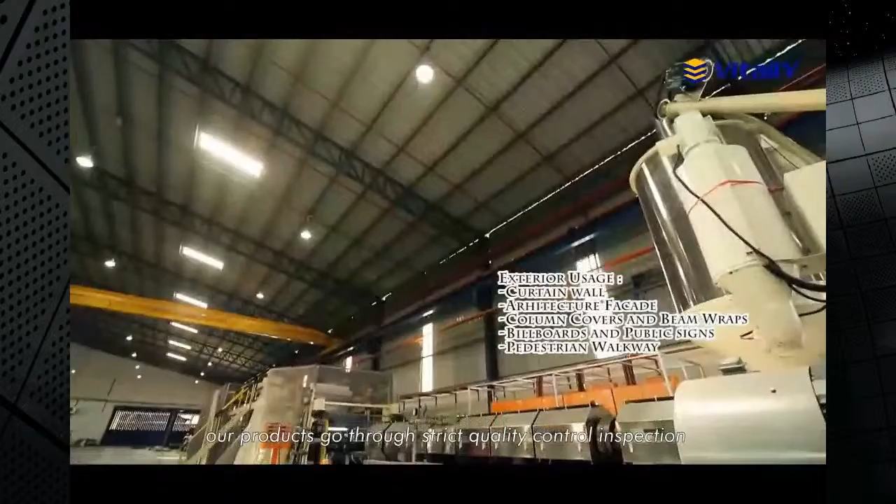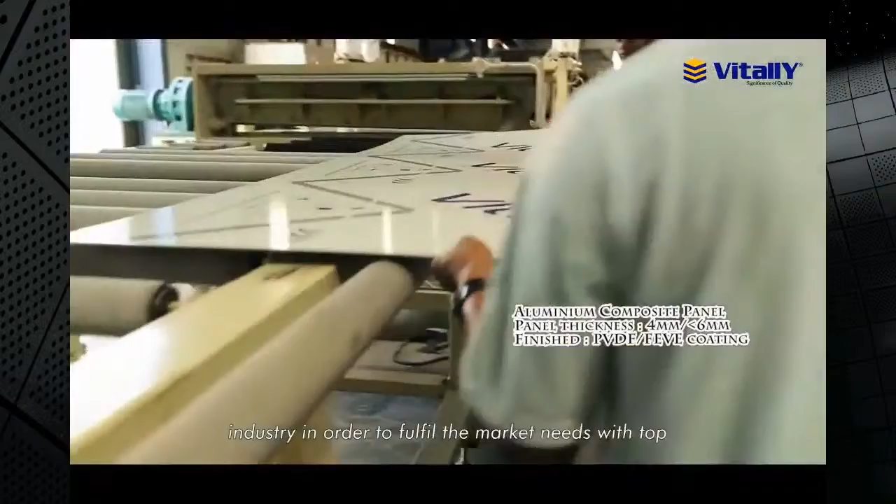Vitally Group is a leading manufacturer and supplier of aluminium home products and aluminium composite panel in Malaysia. We have been awarded Golden Eagle Award and SME 100 Award in 2013 for our outstanding achievement. The origin of Vitally Group started in 1993 when the company's core business was in the trading of construction materials. In 2013, Vitally further integrated into its upstream industry, aluminium composite panel manufacturing. To ensure our products are safe and high quality, our products go through strict quality control inspection. ACP has been widely used for buildings' exterior cladding and interior finishing. Vitally is committed to play an active role in the aluminium composite panel industry in order to fulfill the market needs with top quality products and services.

Our vision is to be the leading aluminium home products manufacturer and supplier in Malaysia, with the Vitally brand strongly present in the international market. Thus, our mission is to continue to expand our business with environmentally friendly aluminium home products, with frequently identifying business opportunities locally and internationally. We have transformed our creative ideas by initiating the Eco Art Panel idea, which is a revolution in the industry. Eco Art Panel is awarded with Green Label by Singapore Environmental Council due to its 0% VOC UV printing. Panel color is guaranteed between 3 to 5 years.

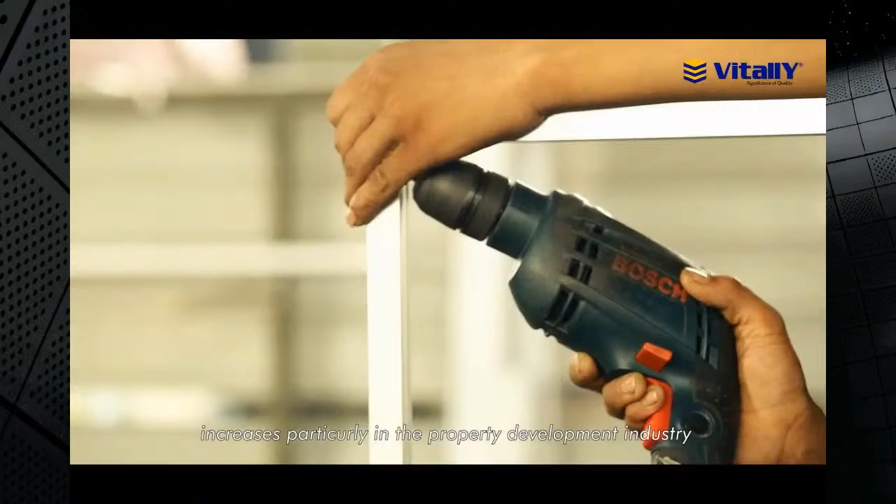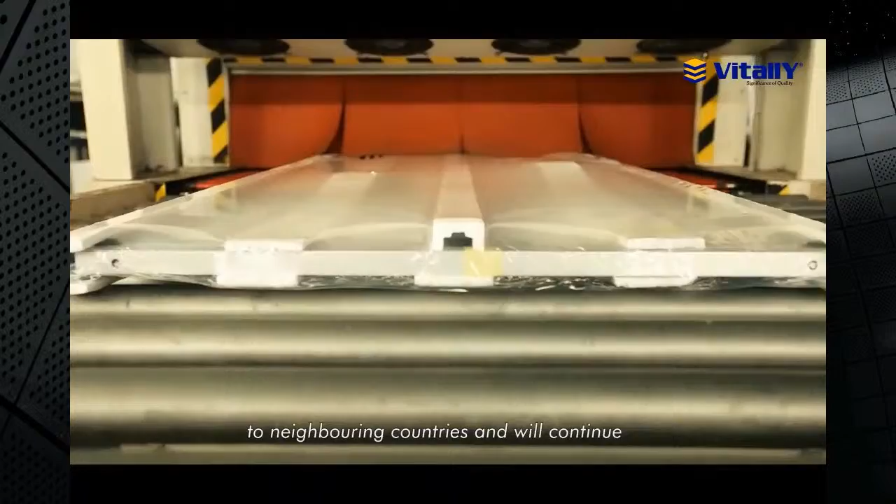As the demand for environmentally friendly aluminium home products increases, particularly in the property development industry, our products can be easily found in numerous high-end commercial and residential properties to international resorts and hotels across the country. Currently, Vitally Group has over 200 employees well spread at our headquarters and manufacturing plant in Muar, Johor, as well as branch offices in Puchong, Selangor, and Bukit Mertajam, Penang. Through our active participation in credible local and international trade exhibitions and fairs, we have recently expanded our export market to neighboring countries and will continue to grow our business locally and internationally.

At Vitally, we believe that a positive and healthy working relationship are the keys to a successful business.

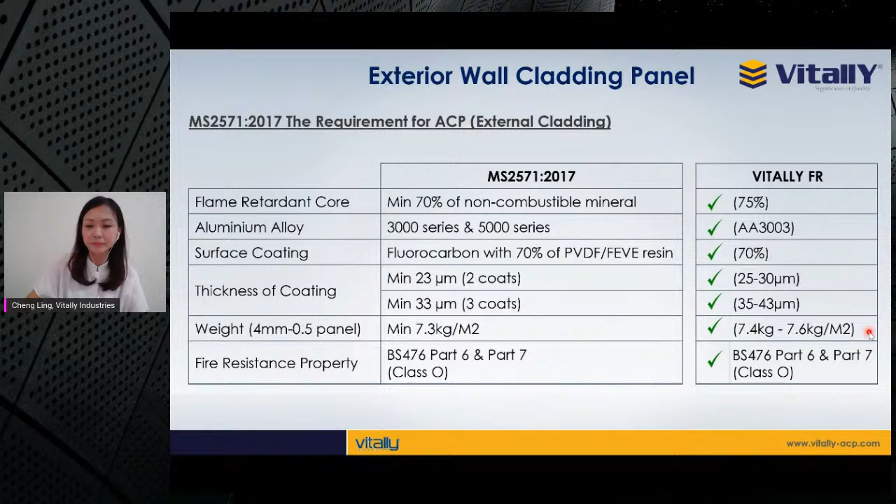This is the standard spec that we have for our FR panel. The total thickness of the panel is 4mm, and for the aluminum skin, thickness is 0.5 for the 2 layers of skin, and the remaining 3mm thickness is the core. For the aluminum alloy, we use AA3003, and for the core, ours is mineral fill core for the FR panel. For the surface finishing, we use PPG coating.

For the panel size, the sheet size, we have our standard width at 4 feet, which is 1250, and we can supply in 5 feet also upon request. For the panel length, we can produce up to 6 meters, which is about 20 feet, but we do have our standard at 8 feet, 10 feet, and also 16 feet.

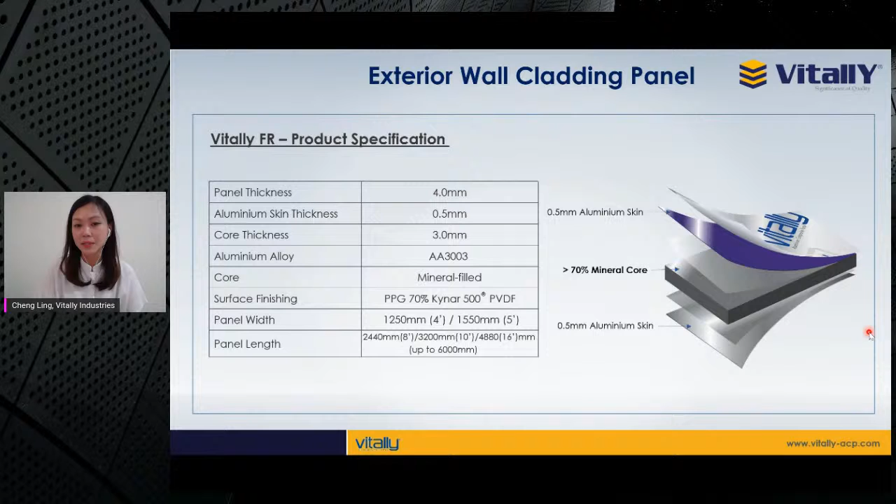Our FR panel consists of 75% magnesium hydroxide plus 25% low density PE, along with other additives to enhance the functional requirements of the product. The magnesium hydroxide itself helps absorb heat from the material surface, which helps cool down the building and also produces a smoke suppression effect.

Our panel has high flame retardancy performance, which helps give more time to evacuate the building in the event of a fire. And of course, our raw material is halogen free and also environmentally friendly.

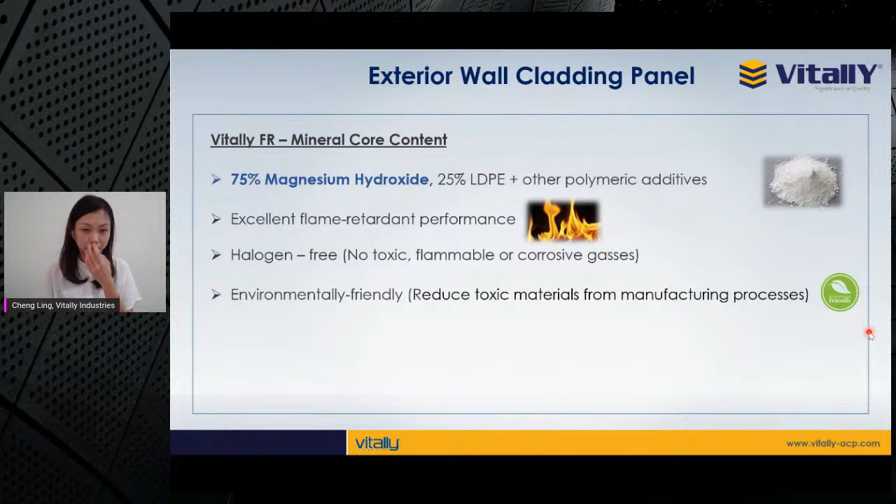For the surface coating, as I mentioned earlier, we use PPG coating. We use PPG coating for the Duranar range, which contains 70% PVDF resin. The 70% PVDF resin is very important because it gives you long-lasting durability.

All PPG color pigments are tested with outdoor exposure testing, and they meet the performance requirement of AAMA 2605. So the coating is highly resistant to chalking, fading, peeling, and also chipping.

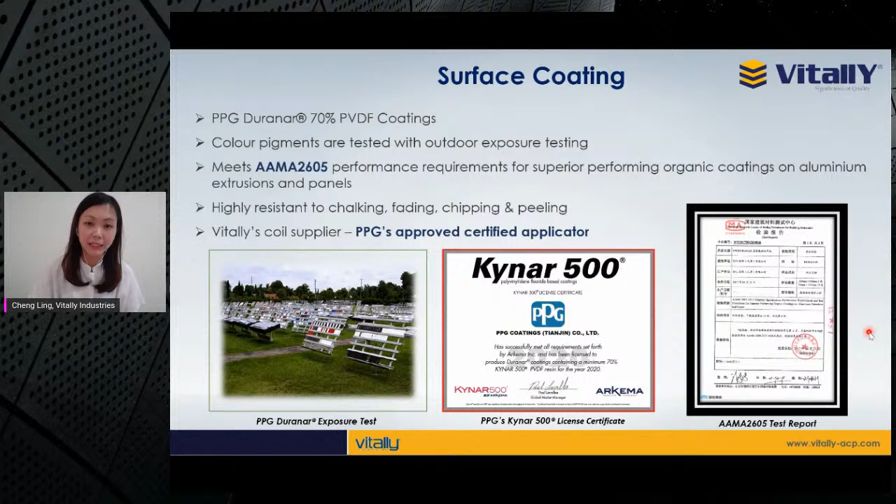For your information, our coil supplier is a PPG approved certified applicator, meaning they are very well trained and well equipped in the application of PPG coating. In order to have this warranty letter from PPG, the applicator must be PPG approved or certified. So this is what our product has been tested for in terms of fire performance.

Our product is tested against both material test and system test. For material test, our product is tested against the requirement of Class O, which is Part 6 and Part 7 test, and also against the fire classification of EN 13501.

EN 13501 is a reaction to fire test. For ASTM E84, this is also a material test, mainly for interior finishes. And for BS 8414, this is a full-scale system test where our product is tested together with other components as a whole cladding system.

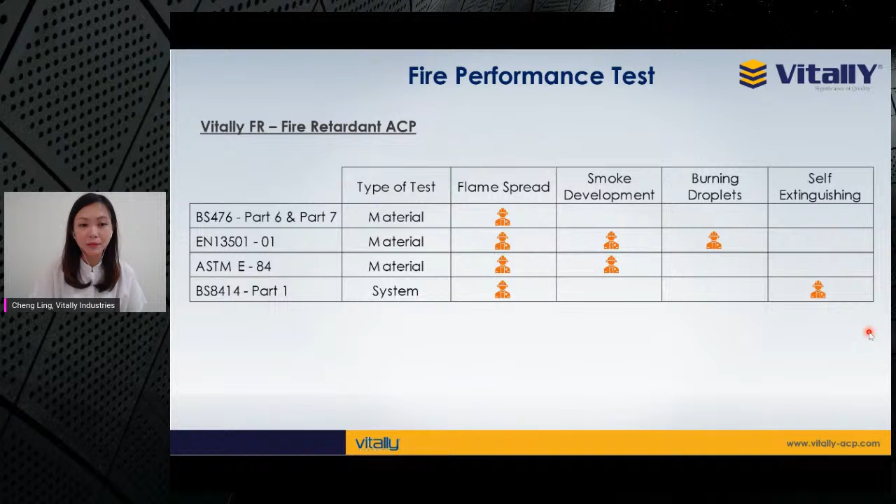I'll briefly explain the four fire performance tests we have done. The first one is BS 476 Part 6. This test indicates the performance of a material in the early stage of a fire, and the result is a fire propagation index. The lower the fire propagation index, the better the resistance of a material against fire growth.

For this test, we achieved 0.5 for the fire propagation index, and for the sub-index, our result is less than 6.

For the Part 7 test, this measures the lateral spread along the material surface, and the classification system is based on the rating and extent of flame spread. For this test we achieved Class 1. So with these two test results, our product is classified as a Class O material.

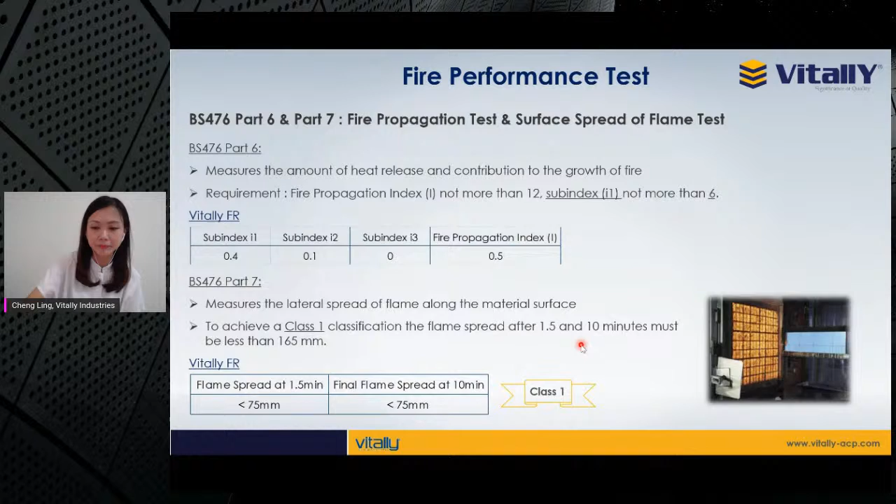Next, we have EN 13501, a fire classification of construction products and building elements using reaction to fire test data. For this fire classification, there are two tests we need to do: the first is product ignitability test under BS EN ISO 11925, and the second is the single burning item test, BS EN 13823.

With these two test results, our panel is classified as a Class B material under EN 13501. The smoke production S reading is 1, meaning the smoke emission level is very weak. And for the flaming droplets, the D reading shows no dripping or droplets. So from this fire classification, we can tell that our product has very, very little contribution to a fire.

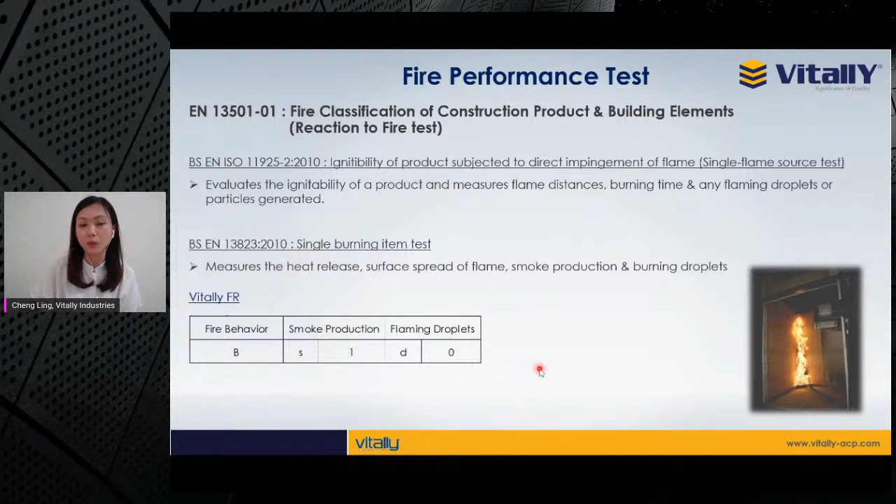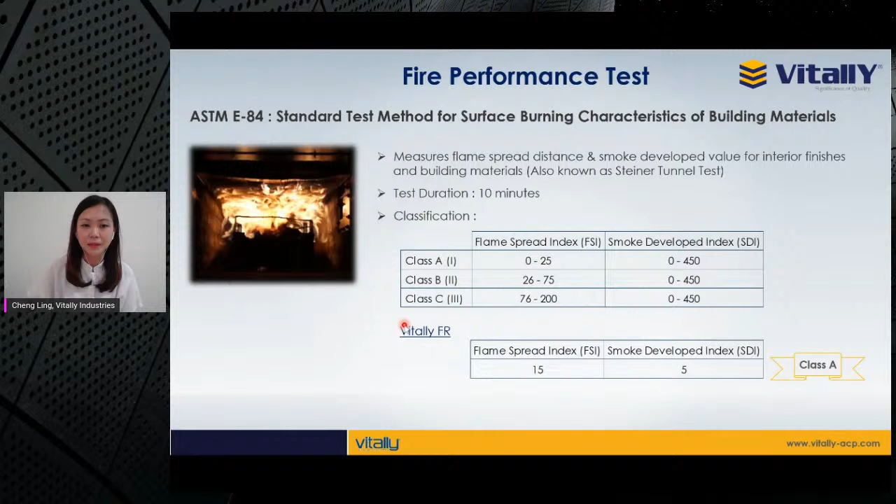ASTM E84 is also known as the Steiner tunnel test. This test measures the flame spread index and smoke development value for interior finishes and building materials, specifically wall and ceiling. The test result is classified under Class A, B, or C, with Class A being the most fire resistant. For this test, we achieved a Class A.

BS8414 is a full-scale system test where every component in the cladding system has to be tested together as an assembly. The purpose is to assess the performance of a complete cladding system, and the test duration is 60 minutes.

The fire will be ignited, and for the first 30 minutes it will burn. After the first 30 minutes, the fire will be put out, and they will continue with another 30 minutes of observation. For your information, this 8414 test is not only applicable to ACP but also to other cladding materials, including EPS, GFRC, and wall tiles.

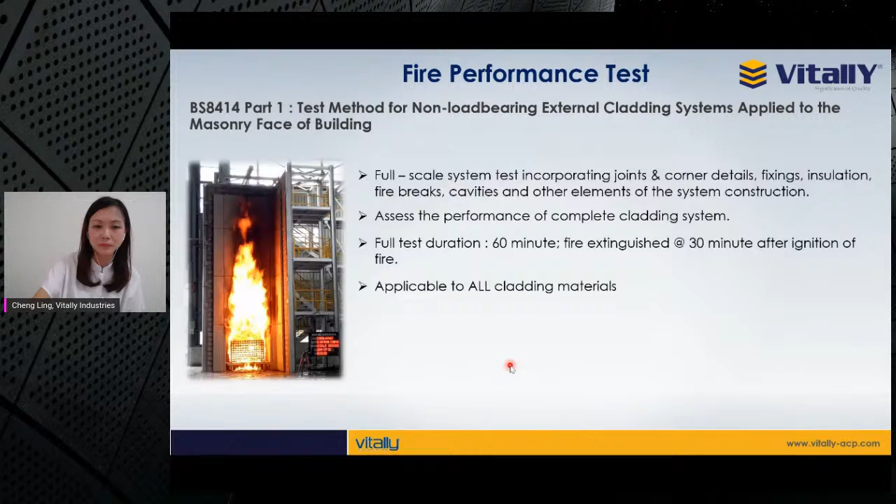This is the test criteria for BS8414. The test is observed based on 5 criteria. The first is internal fire spread, which is flame spread in the cavity area between the wall and the panel.

The second criterion is external fire spread, which is flame spread along the material surface. Then visible flaming means that during the 60-minute test period, the flame cannot spread out of the confine of the test rig, vertically or horizontally. If the flame spreads out of the confine of the test rig, it's considered a fail.

Mechanical performance means that during the 60-minute test period, the system or part of the system cannot collapse out of the designated area. There's a designated area on the floor just in front of the chamber. If anything falls out of the designated area, the test is considered a fail.

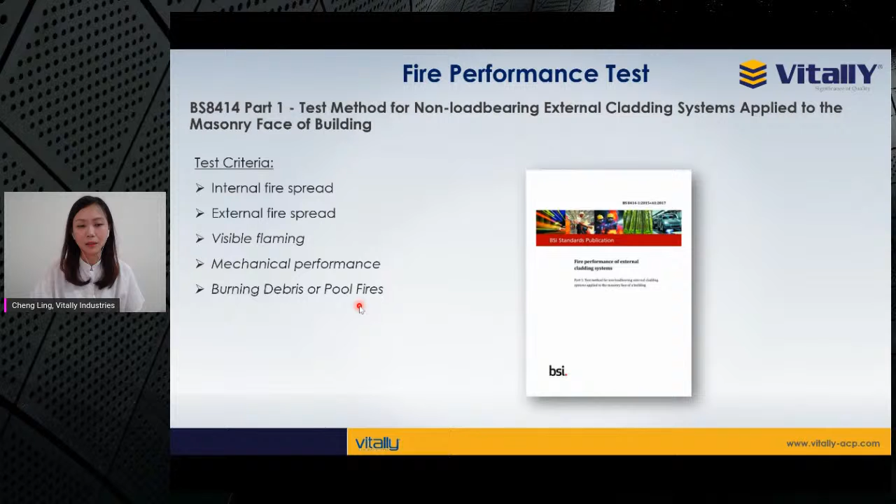The same goes for burning debris and pool fires. If debris falls out of the designated area, it's considered a fail.

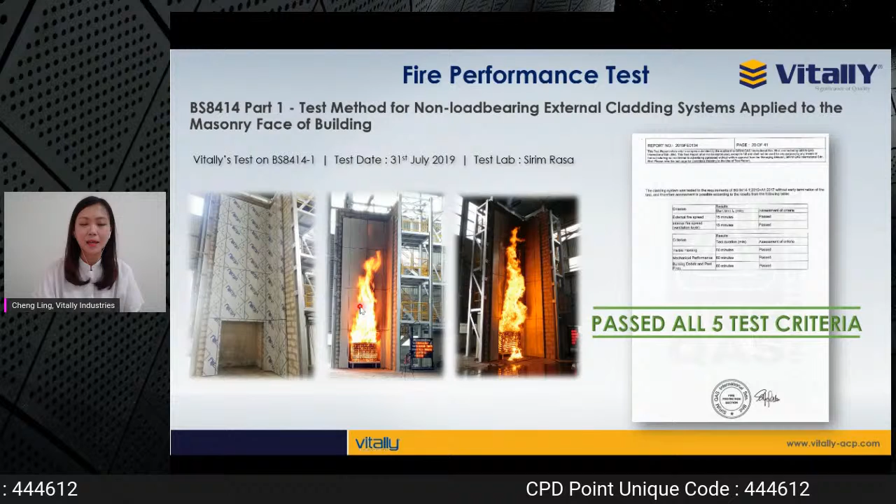This is our test picture. We had our first test last year in Sirim Rasa, and this is a 100mm cavity gap system. We passed all 5 test criteria.

This is some of our product certificate and test report. Our product is certified by CIDB with the PPS certificate in compliance with MS 2571. We also have the BOMBA certificate for BS8414 and Class O, and this is the test report for fire performance testing.

Some of you may wonder how we actually produce our panel in our factory. We have our own laminating line in our factory, and we do the lamination process locally. I'll briefly explain the step-by-step production process.

The first step is the melting process for the core material. When the core material comes in, it's actually in pellet form, so we have to melt it using our boiler machine. After melting, it goes through our 3-roller machine and comes out in a flat shape for the core itself.

That's where we start the lamination for the aluminum skin, for the 2 layers of aluminum skin on top and at the bottom. After that, it goes through a cooling chamber and curing process, followed by lamination of the protection tape on top of the coating surface. Then we do the trimming process and cut to length, and for the finished product we do a final check of the panel dimension.

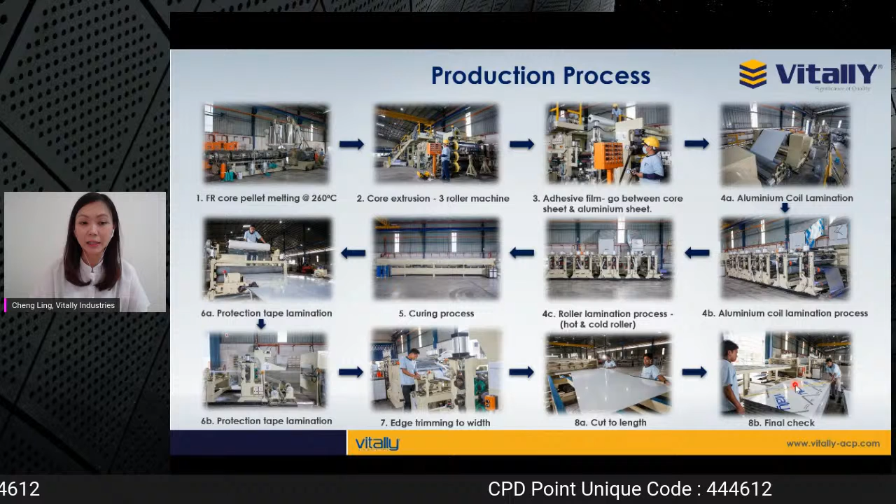In terms of quality control, we actually have a very complete QC process that covers incoming raw material checking, in-process checking, and of course finished product inspection. So as a manufacturer, we don't only check the finished product, but we also have to make sure that the raw materials we receive from our supplier are qualified for the production of the product.

So this is just to share with you some of the QC tests that we do in our in-house lab. This is the testing on the raw material, mainly for the aluminum coil. For every single roll of aluminum coil that we receive from our supplier, we have to go through all these tests: color checking, thickness checking, coating flexibility, and resistance tests.

For the color test, for example, we will check the color for the new batch of product and compare it to the master copy that we have. If there's any variance between the two samples, it must not be more than 2 delta E.

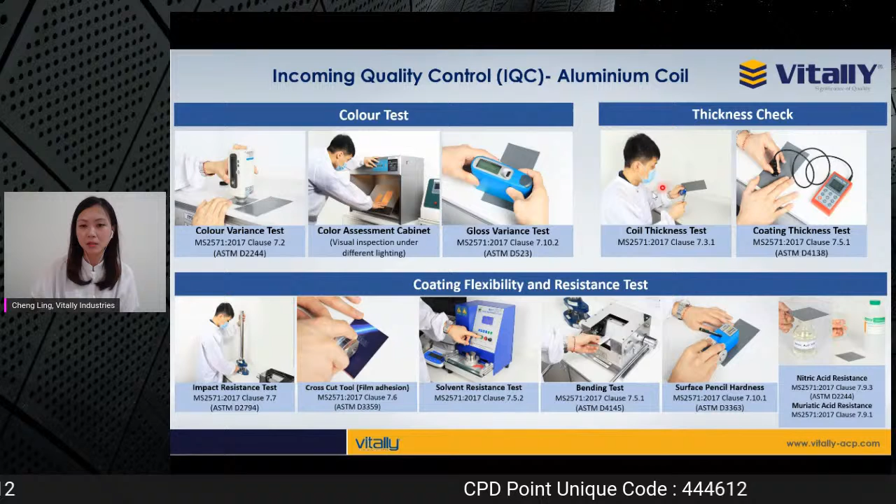Then we'll check the glossiness, the coating glossiness, and for the thickness checking, of course we'll check the coil thickness itself, as well as the coating thickness. Basically all these tests are to make sure it meets our internal standard and also the requirement according to MS standard.

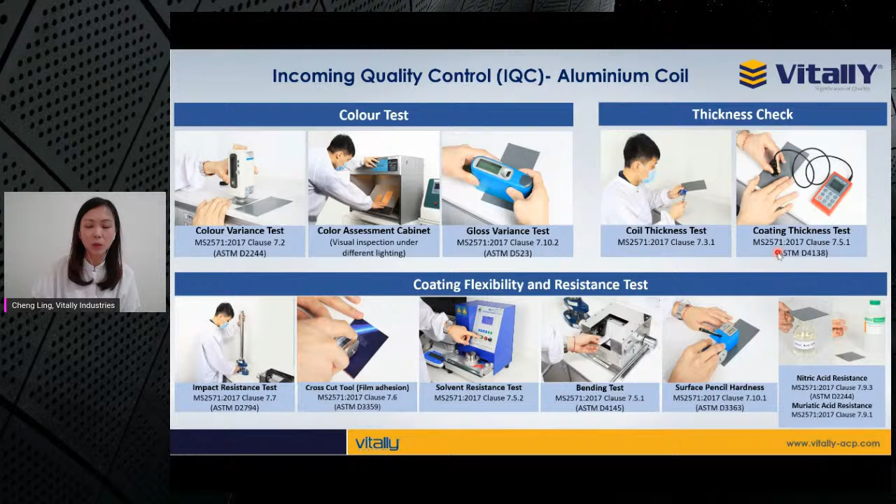For the finished product, there are two main tests that we do: the first is the peel strength test, and the second is the boiling water resistance test. For peel strength, low peel strength means it's easier for the skin to get peeled off from the core, while higher peel strength means the chance of delamination is low. For the boiling water resistance test, the result must not show any separation between the core and the skin.

Sometimes we will also do some optional tests. We have our own fire chamber for small scale fire testing, which is part of the test under EN 13501, the reaction to fire test.

We also have our own machine to check cyclic corrosion. For product warranty, we give 10 years of product warranty against manufacturing defects, covering color fading, chalking, and delamination.